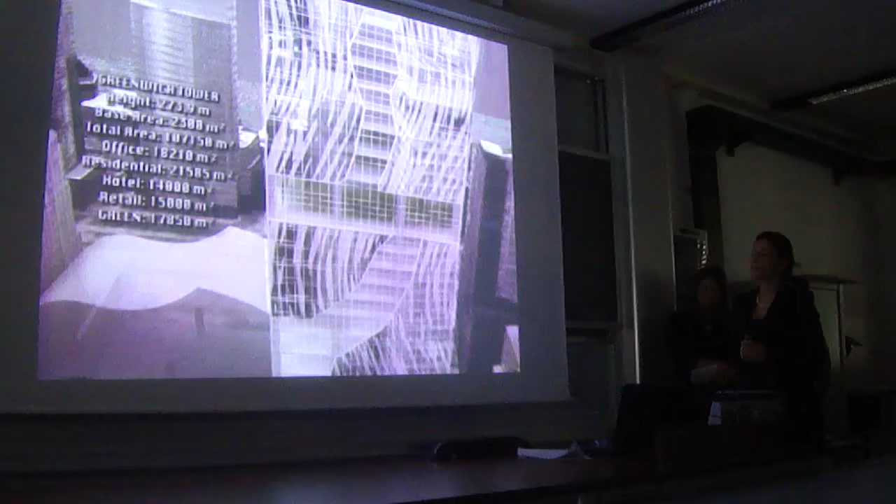So this is the summary of the zoning, the financial district, and Battery Park City, mostly residential and offices. And this is the platform summary and the views of the Statue of Liberty. The facts about the building and the numbers, approximately.

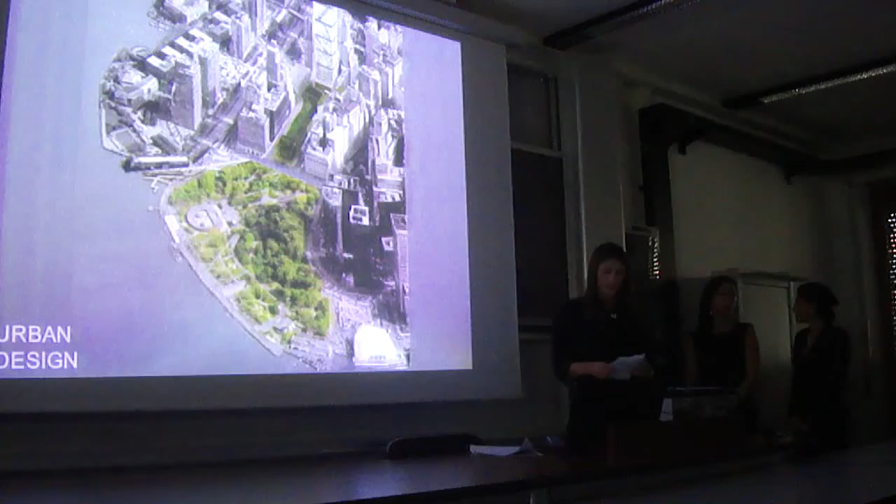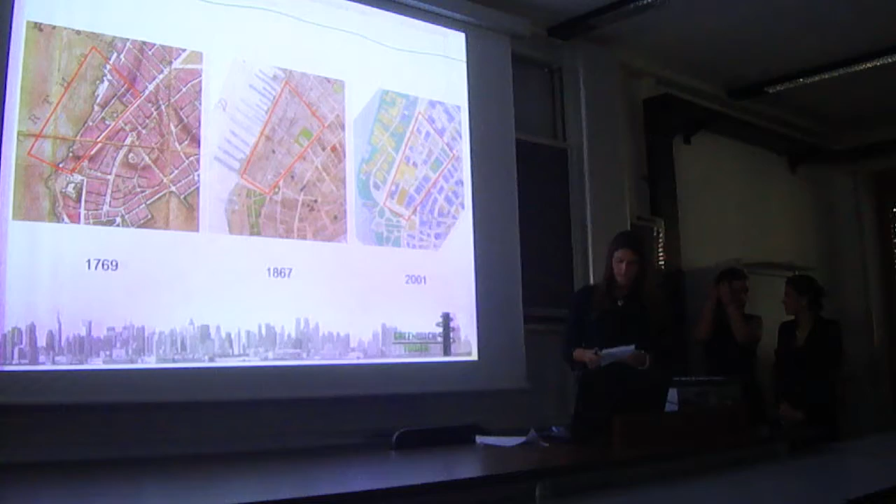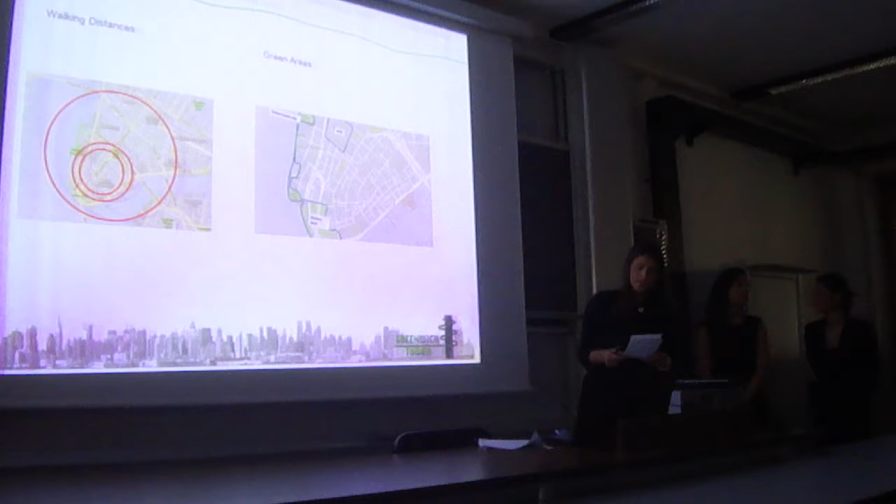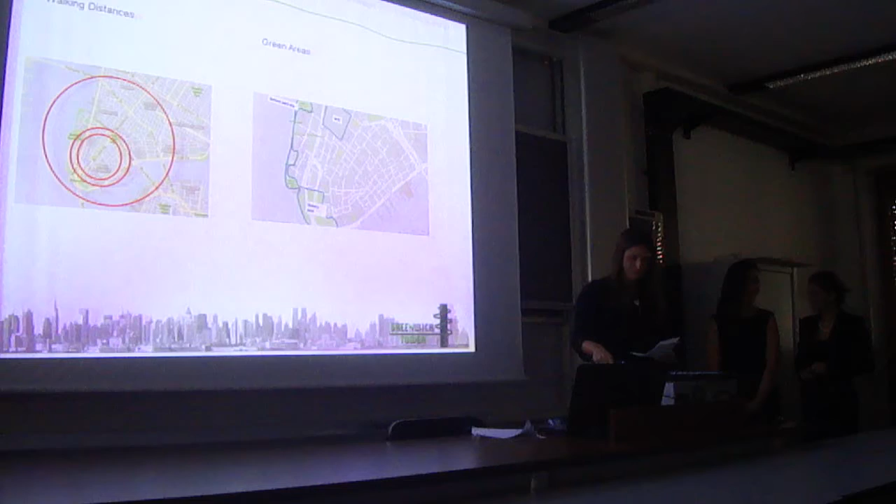With the urban design part, what we basically did was to cover the Brooklyn Battery Tunnel with a green platform, creating a new park. The area is located in Lower Manhattan, in the district of Greenwich South. We can see the development of this area through the years. Our main neighbors are Wall Street, the World Trade Center, Battery Park, and Battery Park City. All these sites are 5 minutes walking distance from the center where our tower is located. We don't have green areas inside our zone, but we have a few close to it. The scale of the area is about 11 Piazza del Duomo.

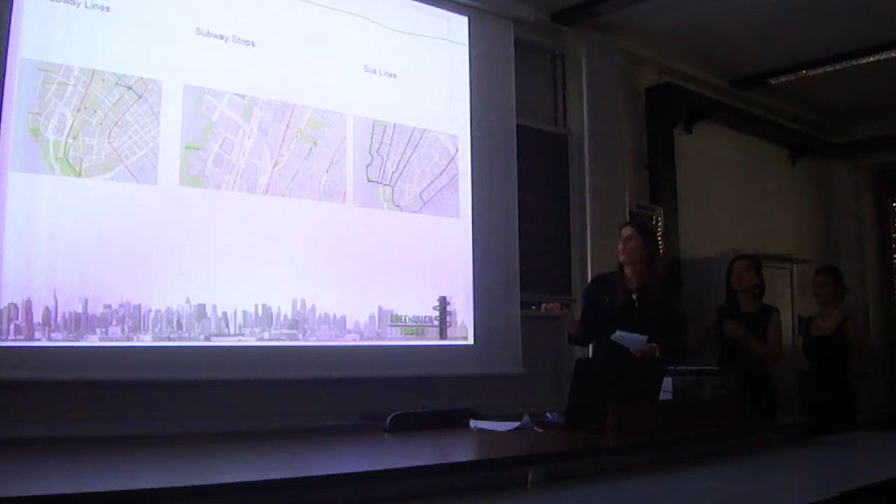As well as the whole city, it's well served by public transportation, but we wanted to increase the bike routes to encourage people to bike and walk. From the SWOT analysis, what we got is that our weakness is the existing tunnel, but at the same time it is our opportunity because we are creating a new public space.

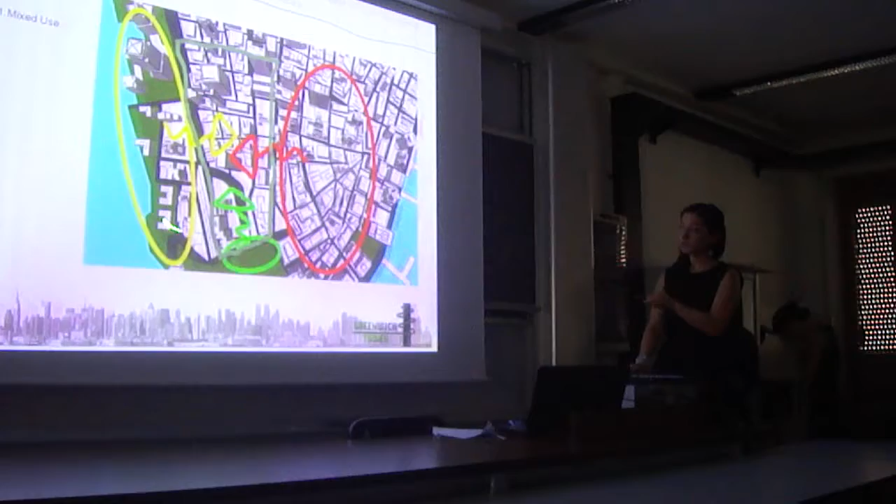So for our design, we set some goals. And first goal, as we mentioned, was to create a mixed use because, as you know, our Greenwich neighborhood is just in between a workplace and a living place. So we wanted to create a place that combines work, live and play, and that brings all together into one zone.

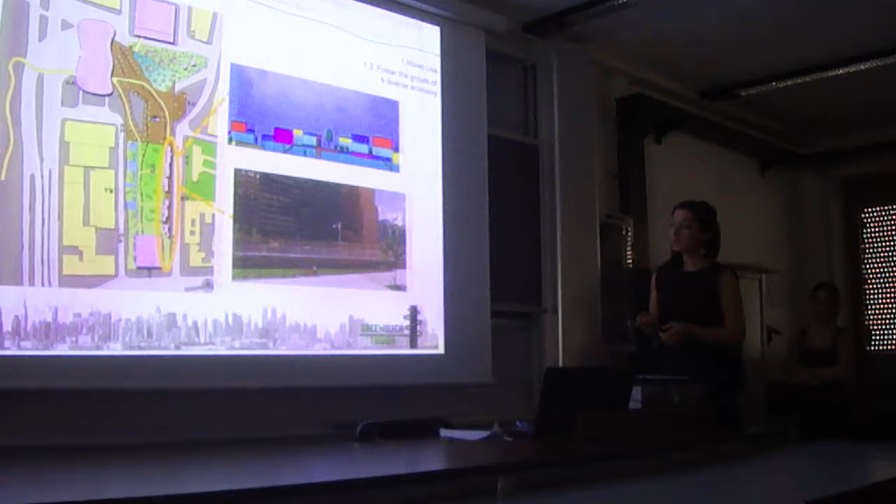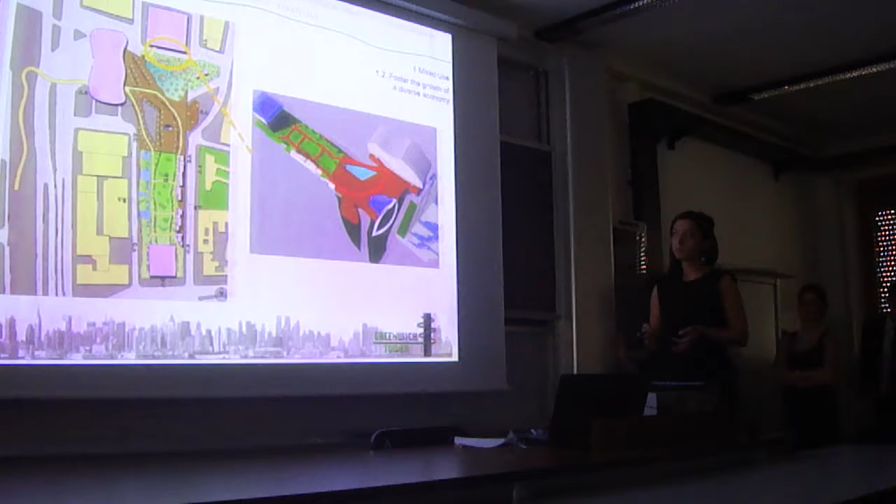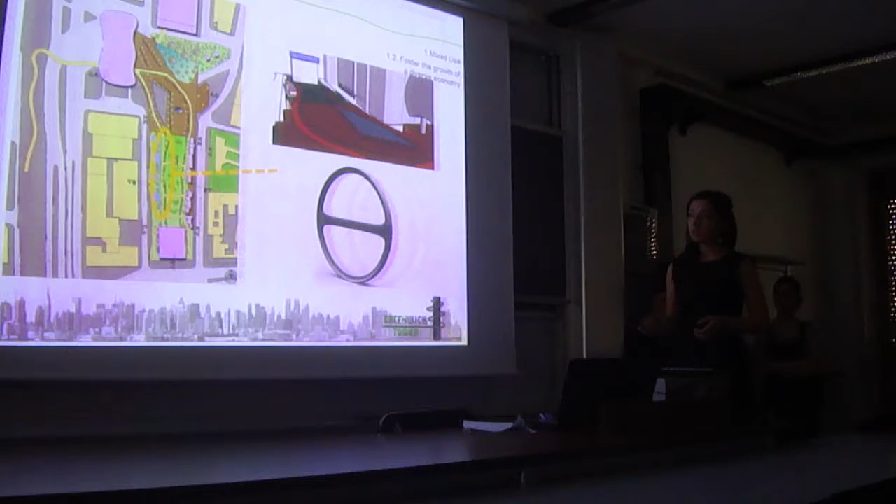For this purpose, after closing the tunnel with a platform, we started to try to foster the growth of a diverse economy by, first of all, creating some little shops along the street which serve two levels, the zero level and the platform level. Then we opened a street right in front of our building which will provide easy access by taxis and by cars. And the third one was to create a Wi-Fi zone on top of our platform. And finally, we created a bike lane, which also provides bike parking that combines with the existing route.

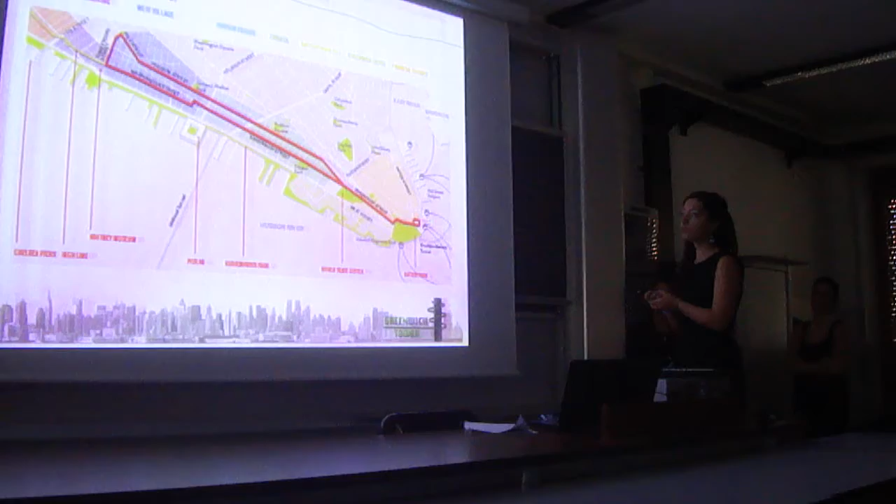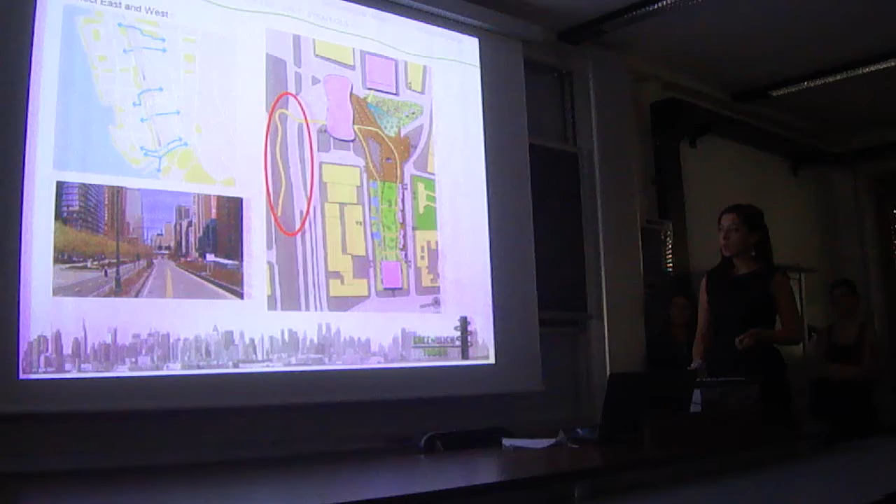And the second aim was to reconnect Greenwich Street because, as you see, Greenwich lies on a lane which has many important spots, but Greenwich hasn't received its right value. For that purpose, we made Greenwich a main street, and we created shops which would provide a 24-hour alive street. Then we wanted to connect east and west. For this purpose, mainly we wanted to connect the 12th Avenue, which is really big, has a tunnel, and the accessibility is really difficult. And for that, we created a ramp that is also accessible by bike and pedestrians.

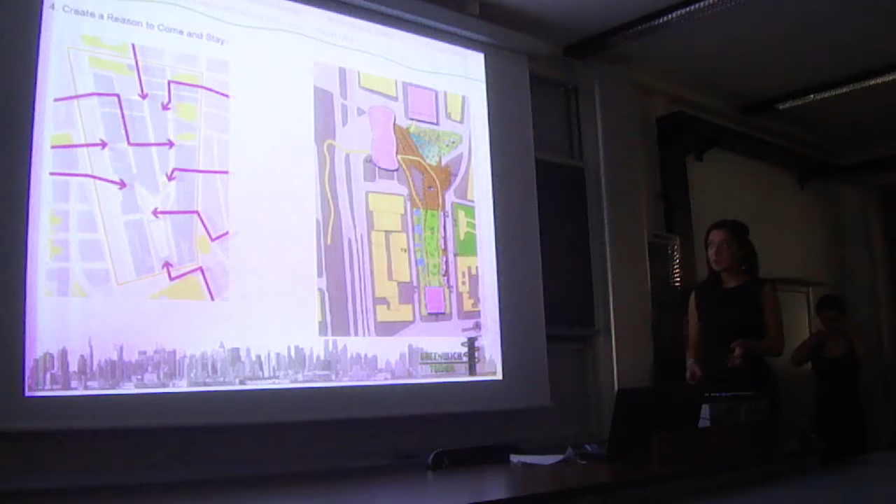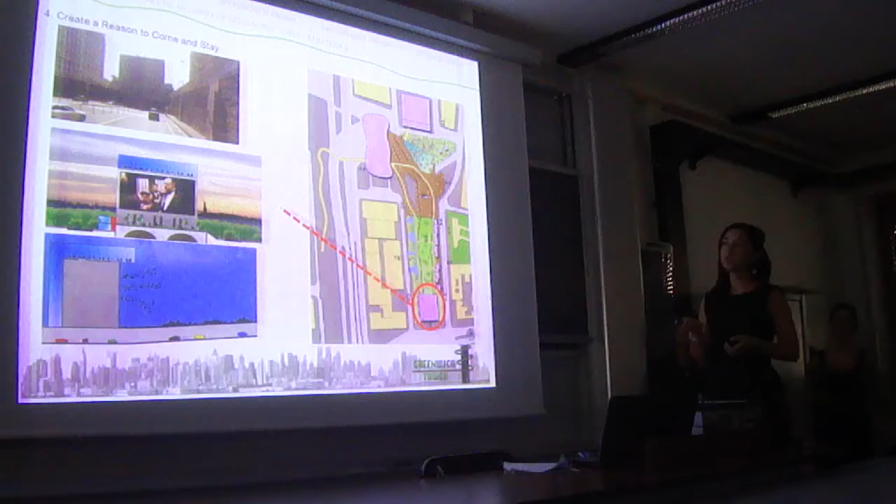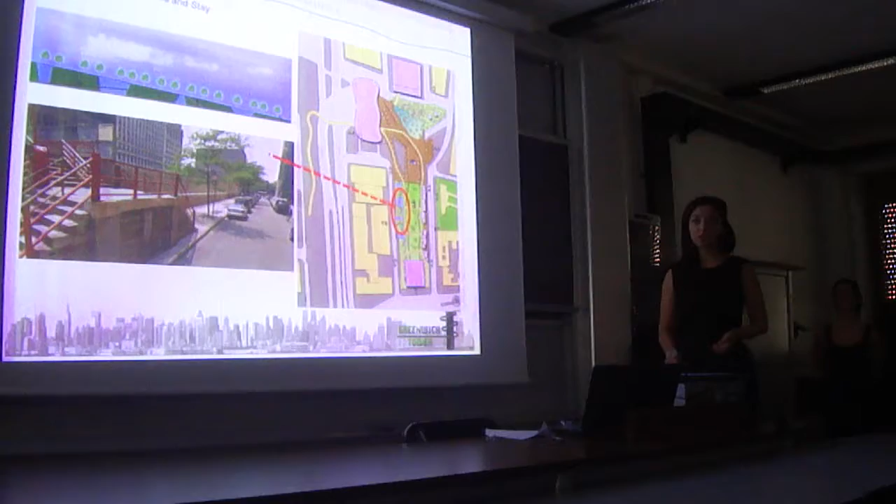And last but not least, we wanted to create a reason for people not only to come here, but to come here and stay here. For that, first we opened an open-air cinema. So when you sit here, you can watch your screen, and you can have both your movie and also the Statue of Liberty view. Second, we created a hill with waterfalls that would give a green experience in the center of a metropolitan city.

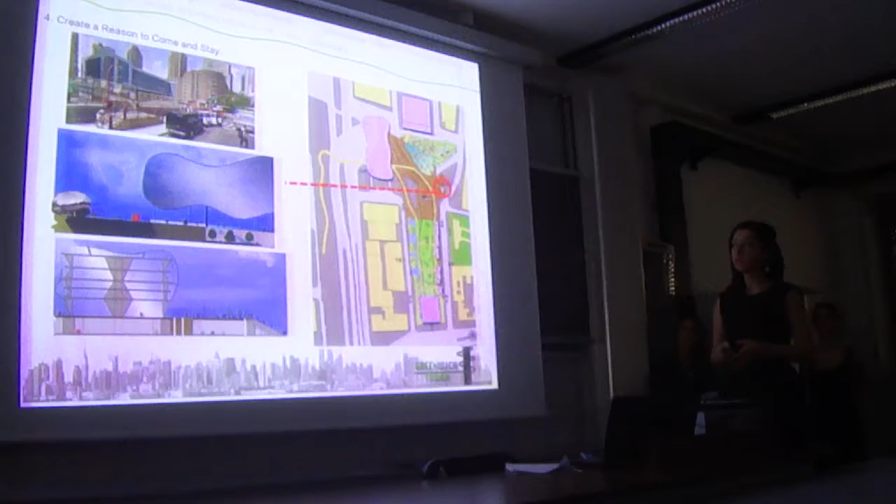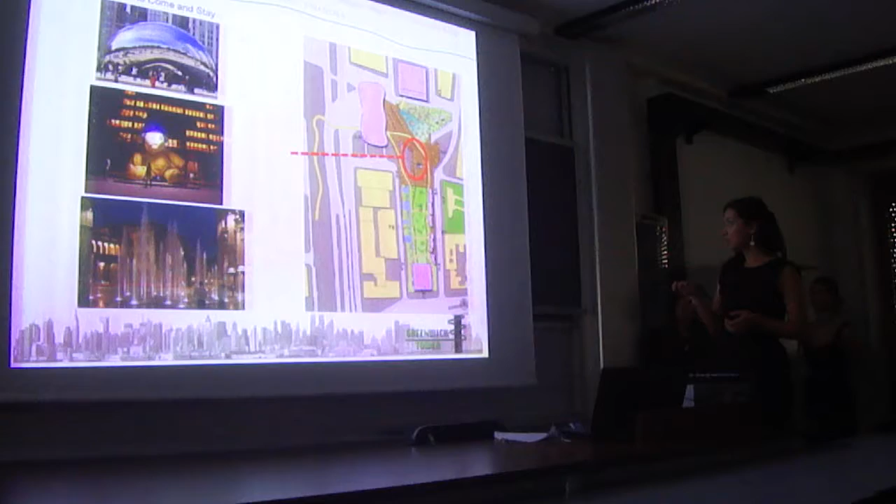And then we created a staircase. As you might know, in New York, stairs have a special meaning. Especially, this stair is a light structure that hides the metro exit, and plus it has a bike park. And finally, we created some water fountains plus monuments that are really in fashion right now in New York.

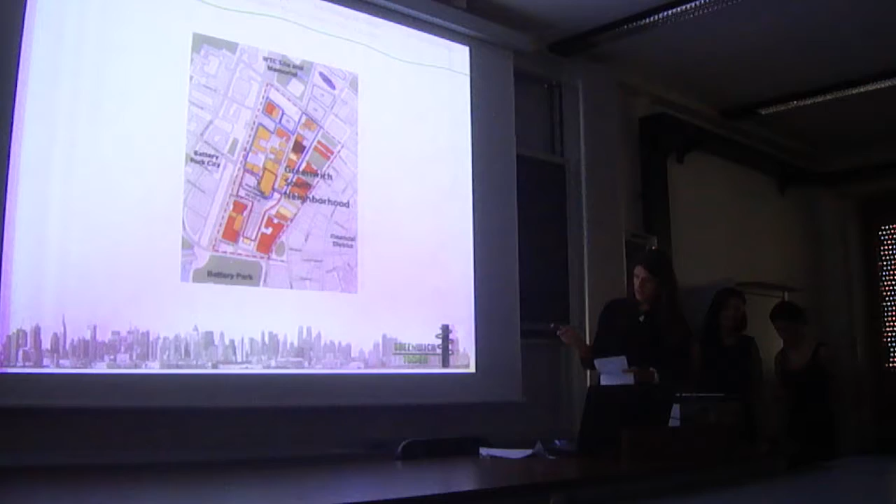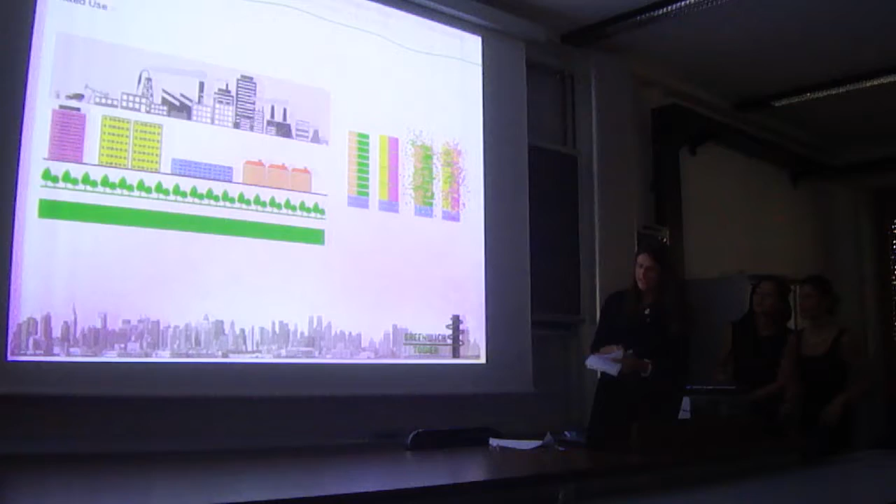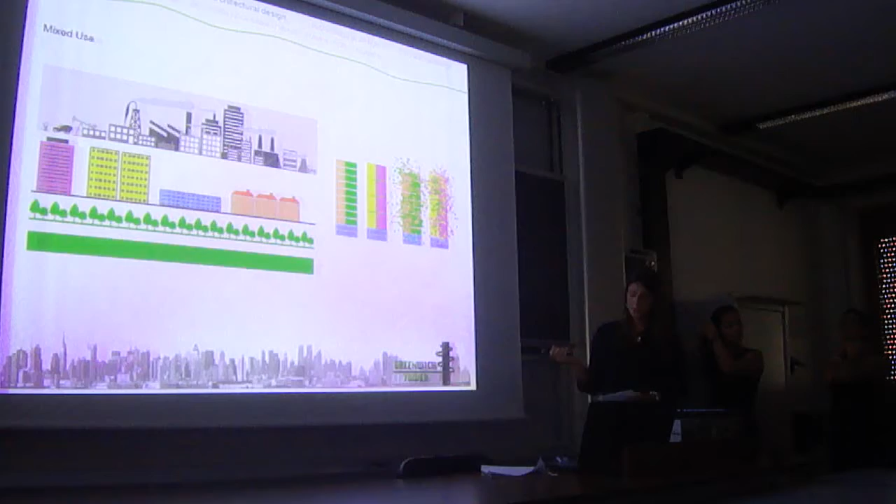Okay, continue with the architectural design of the tower. We are doing the skyscraper on the site of a garage building here that we are going to demolish. Here is another garage building that we are redesigning but keeping the same function. We have two main concepts. The first one is the mixed use. Our tower should be a piece of a vertical city. And we want the presence of people in the building at different schedules for different uses, but at the same time they can share some facilities in common.

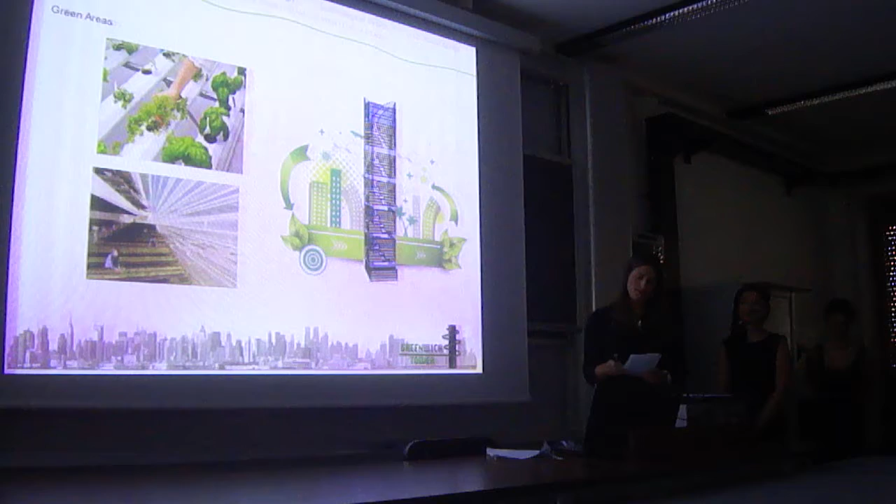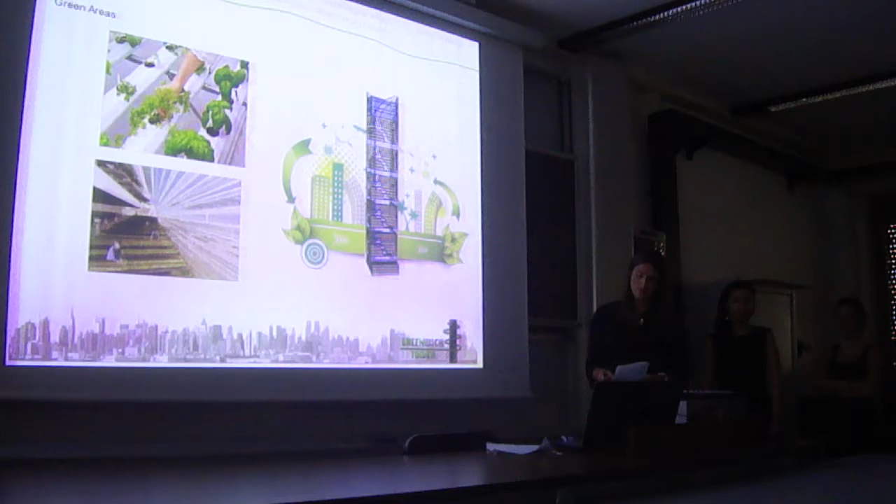The second concept is about the green areas. We are using the green as a function with the same importance as the other ones. So we have main green floors along the tower, but we also have pieces of green areas on each floor, and they are all connected through the facades. We want to introduce also the concept of urban farm. That means we will rent these pieces of land for hobby farming purposes.

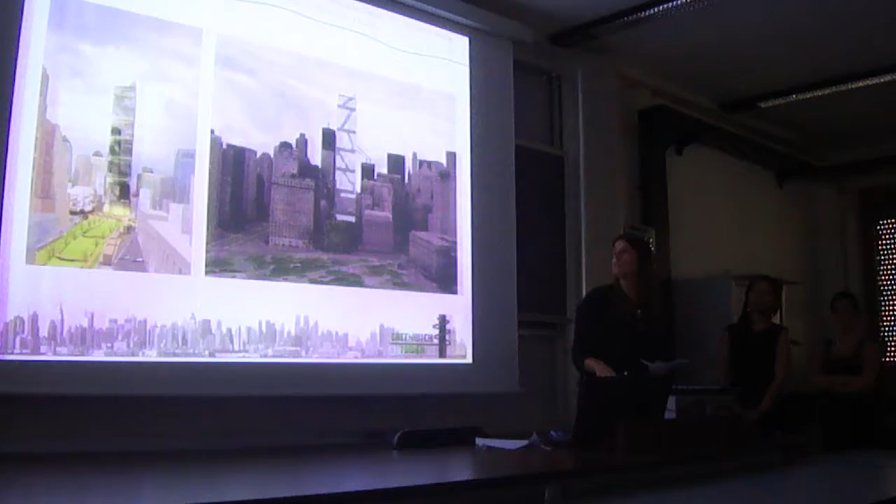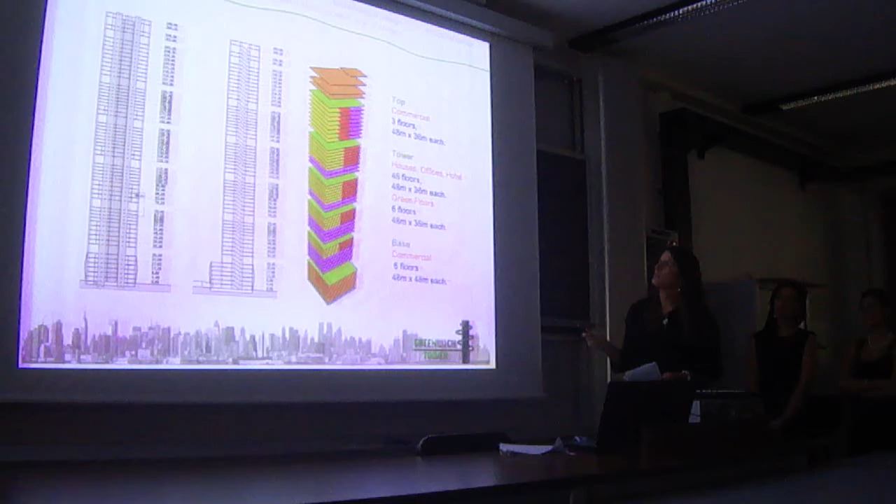This is our final volume. We decided on a regular shape. So the tower has a commercial base, and the top is commercial as well. Then it's divided into 5 blocks, divided by the public green floors. Each block starts with office floors, and then it finishes with residential and hotel, except on the last block where we mix all 3 functions.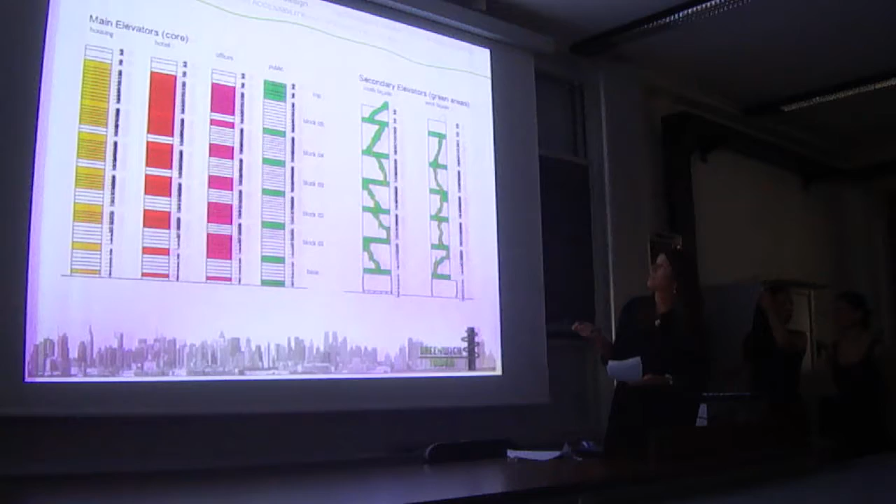The accessibility. The commercial base has its independent circulation. So for the tower, the elevators are separated by function. It means if you get an office elevator, you cannot access the hotel area, even if they are on the same floor. We have the chance to switch to another group of elevators in the public floors, because they have sky lobbies for each function to control the access. The secondary elevators are for the green areas on the south and west facade, where our farm zones are.

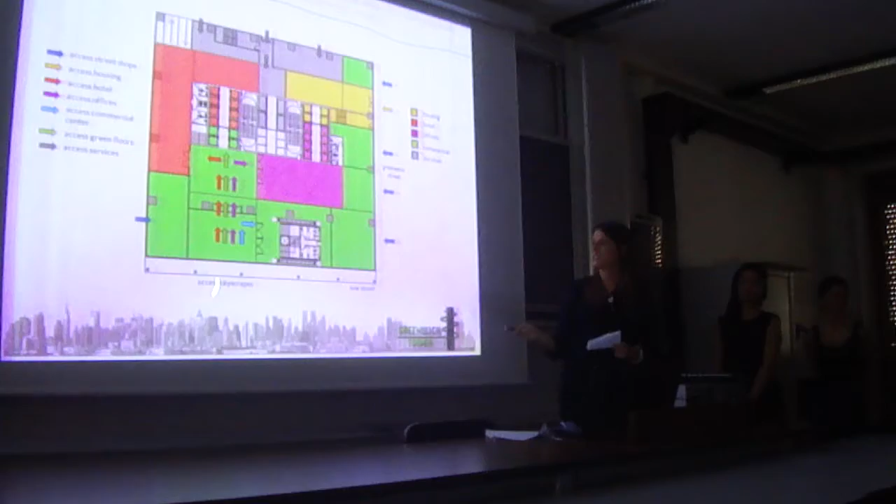Module: we started the plans creating the service core, and then a 3x3 grid. 3 meters because we fit a hotel room, and also because of the mullions of the facade of 1.5 meters. This is the accessibility on the ground floor. On the south is the main entrance of the skyscraper, and from here you can access the public commercial base, the public elevators, the offices lobby, the hotel lobby. The housing has a private entrance, and here we have street shops. Here the service entrance and parking entrance.

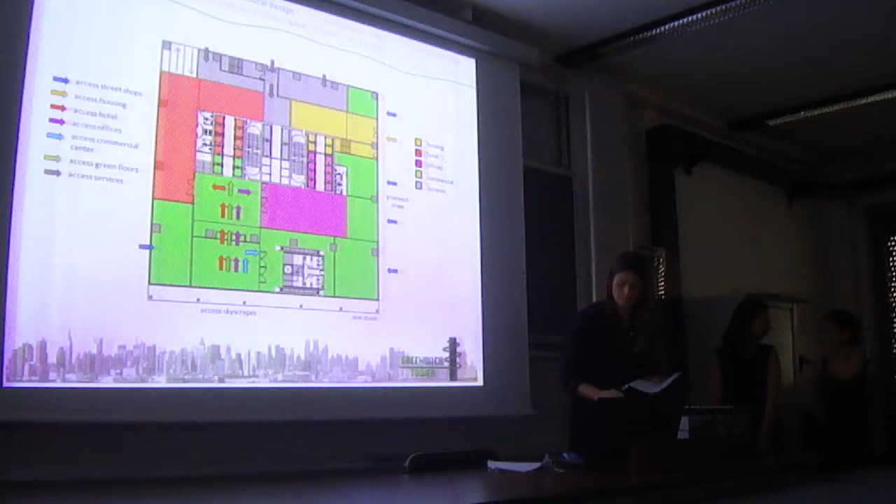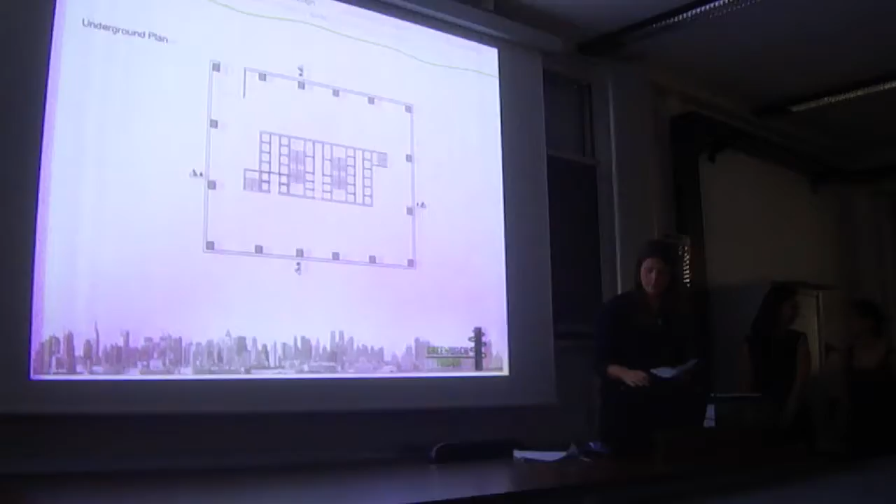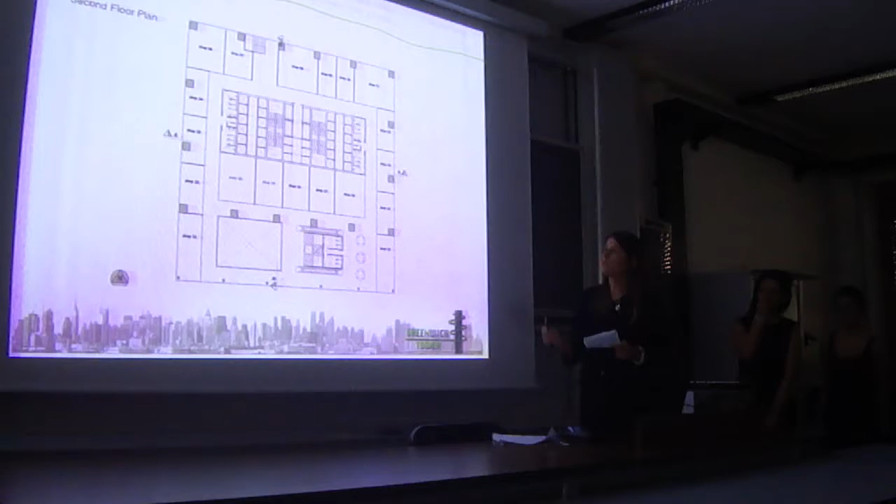The underground floor. In the underground, we have a mechanical parking system. From the underground, you can access the ground floor through stairs, or access the public green floors through the public elevators here. On the first floor, we have our food court, because of the lack of places to eat in this zone. We are making this connected to the platform level here. On the second floor, we start the shops, and it's the same up to the 5th for the commercial base.

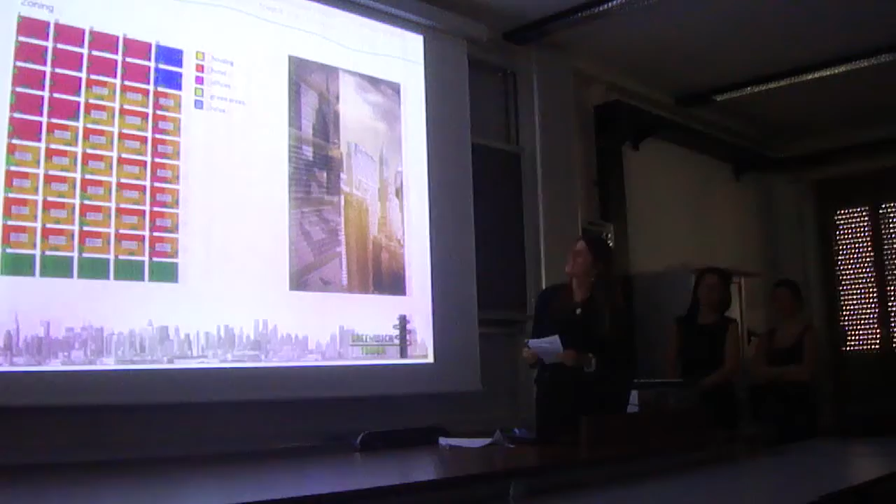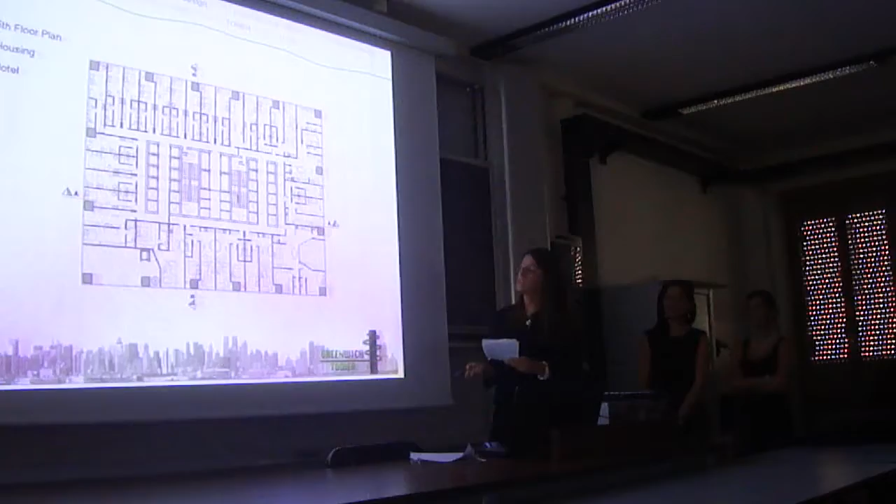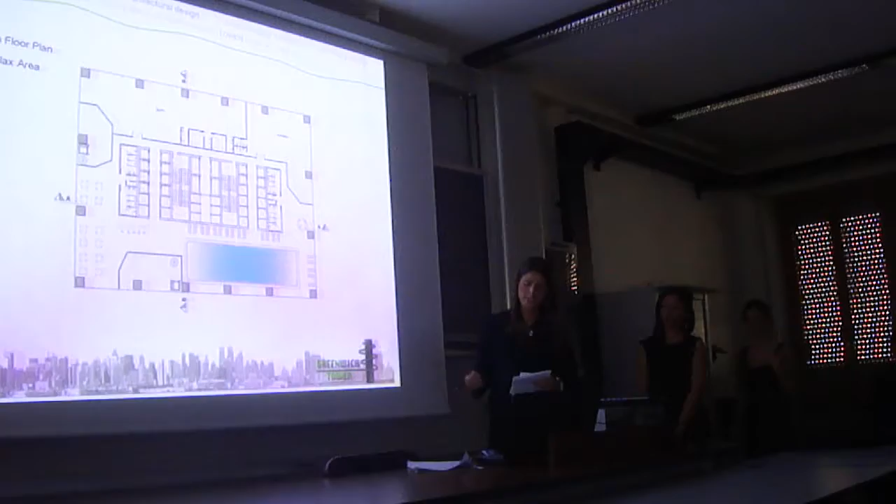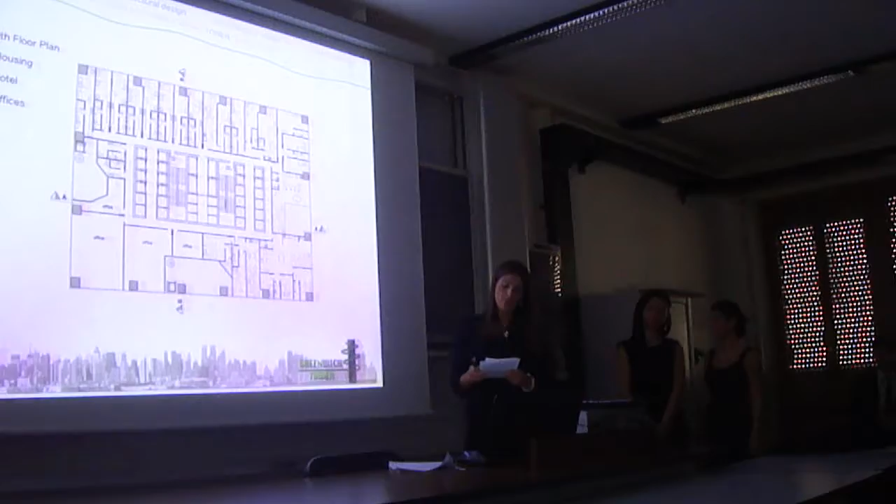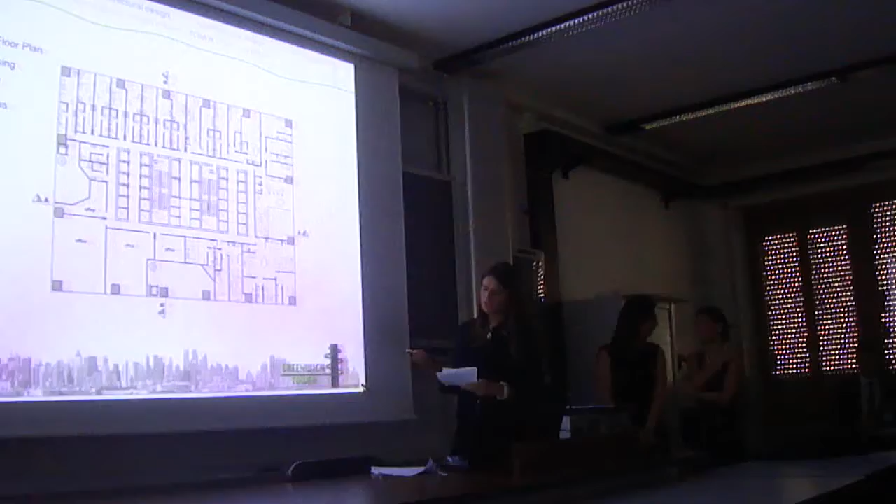In the last block, we finally can mix all the functions, all the 4 functions. The floor height is higher, and they are the upper floors. It's with the best view, which means that we have more expensive apartments and hotel rooms. The offices area is also different, because now we have smaller rooms, for example, for lawyers instead of the big companies. This is the top, it's a triangular closing, it's a continuation of the green paths. It creates a peculiar space, ideal for a coffee shop with different levels.

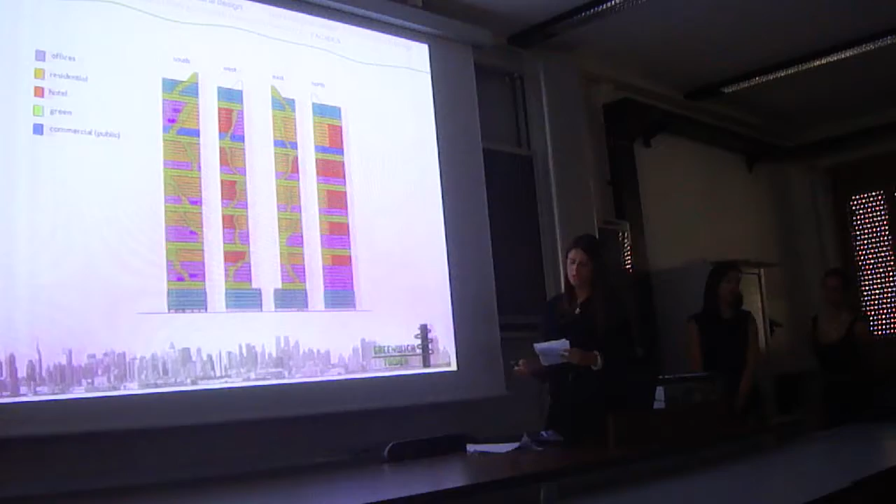Here the facade orientation in our conception. The apartments deserve the best solar orientation, so most of them are in the south and in the east. We use the north mostly for hotel rooms because they are used at night. Here is study of patterns for the facades, and this is how it looks like in the end.

And so the technological design. First of all, we wanted to create some boundaries for us, for which we use LEED. As you know, LEED is the system that the United States uses for green design. It has different levels, and they get these results according to sustainable sites, water efficiency, energy and atmosphere, materials and resources, indoor environmental quality, and innovation in design.

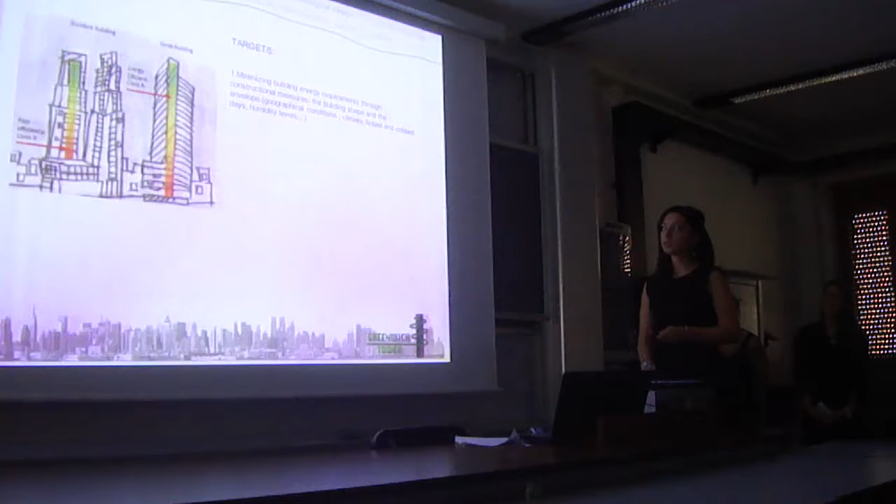And our first target was to minimize the building energy requirements through construction measures, which mean the building shape and the envelope. For this purpose, we needed to go through all the data that we could find. And we started designing our system for an efficient technological system. For this purpose, we started defining the orientation and shape. The shape was, for simplicity, a square. Then we turned it into a rectangle for a better saving of daylight. And we gave south to housing and green and north to hotel.

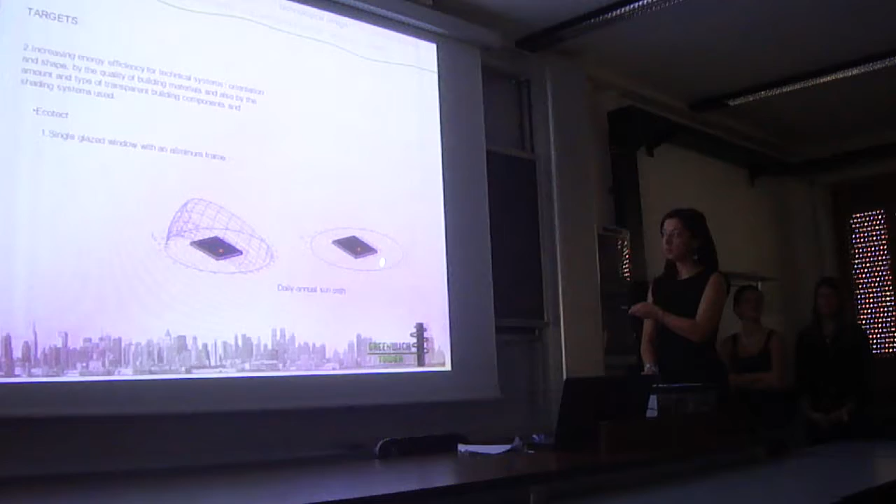And for the design of the facade, we started using Ecotect. First we did some calculations for single glazed windows with an aluminum frame on the model that we created for a single floor. After the calculations, we calculated the same system for double glazing low-E windows because we wanted to have a whole glass facade. After these results, we compared them and we saw, of course, double glazing low-E windows would give much better results.

And for solar protection, since we have a whole glass facade, we needed to find some solutions. The first solution was fritted glass. And the second was movable louvers, because we have 3 different types of usages in our building. We didn't want to fix one type of solar protection in our system.

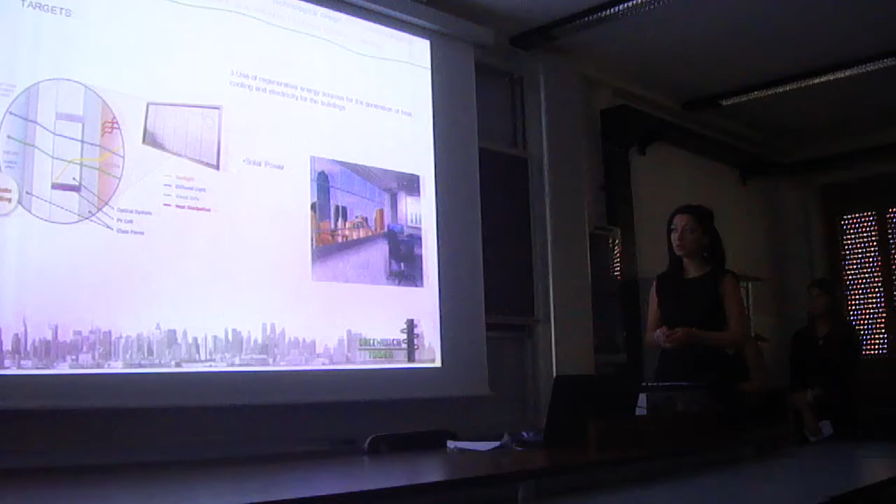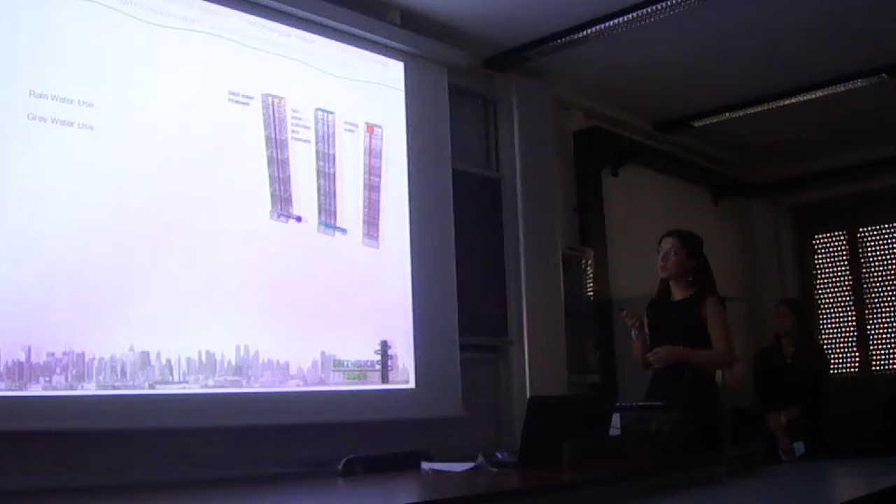For this purpose, we created a black water treatment at the base of our skyscraper, and this tank would treat the water and send it back to the top and collect it as grey water, which would be used later in the lavatory, in the flushes. Also, we collected rainwater at the rooftops, and we send it back to the same tank. We created another tank for drinkable water in order to prevent any problems because of the pressure.

The main problem actually in our building was the building service design, because we have three different types of usages, so they need different service systems. But we decided to use an all-air system for the whole building for simplicity. And to go more into detail, for example, for office we use underfloor air distribution, and the core was in the center and then distributed to the whole floor. The air can be distributed underfloor and then collected from the ceiling.

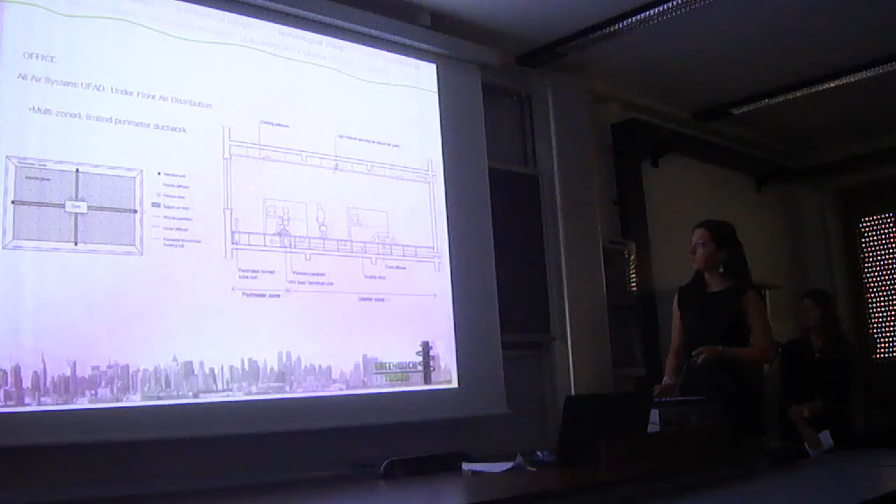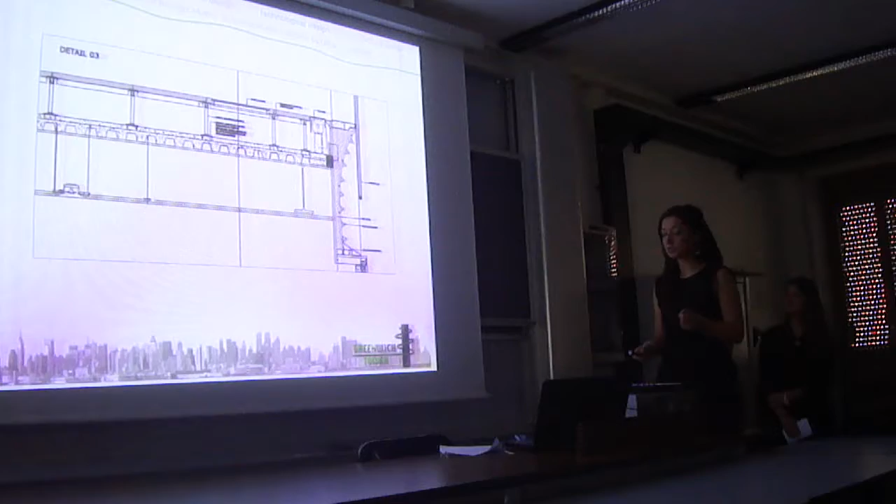And when we come to the details, as you see, the slab is a normal slab which is mainly used in the buildings. But our innovation was creating a facade which would look different from outside. So we used silicone double glazed window, and plus we wanted to create a metal, reflective metal especially, that would take the light and diffuse it like a disco ball actually.

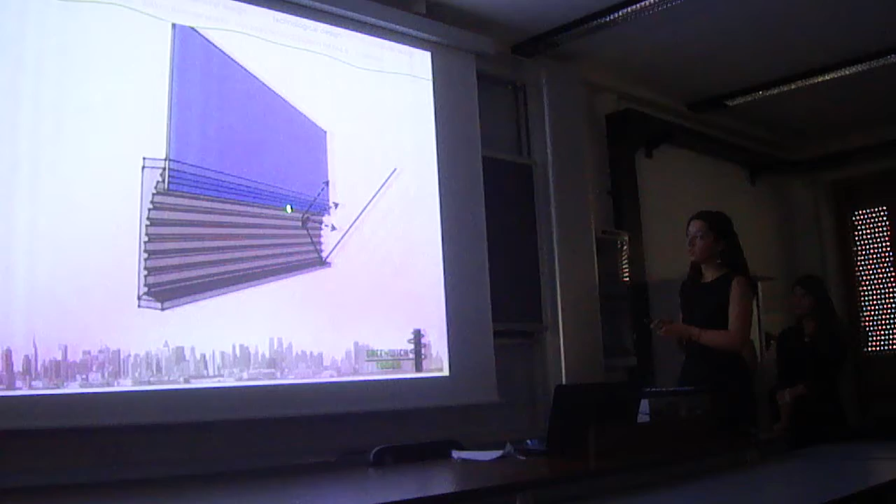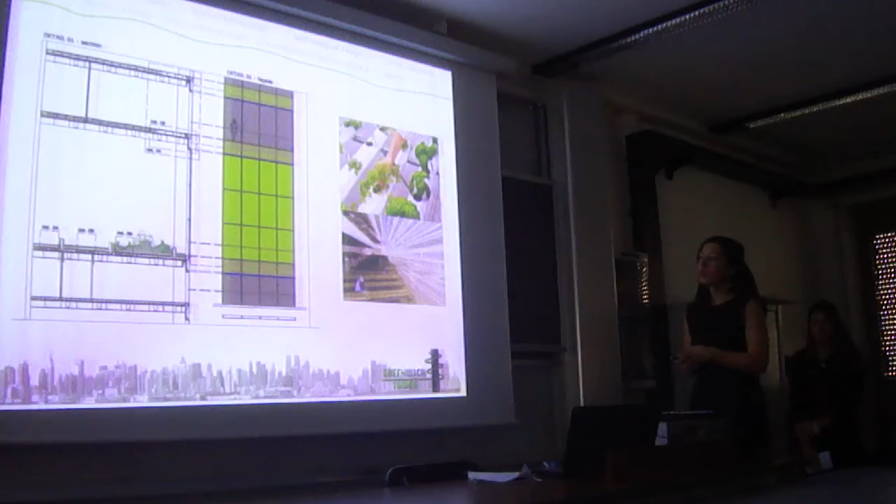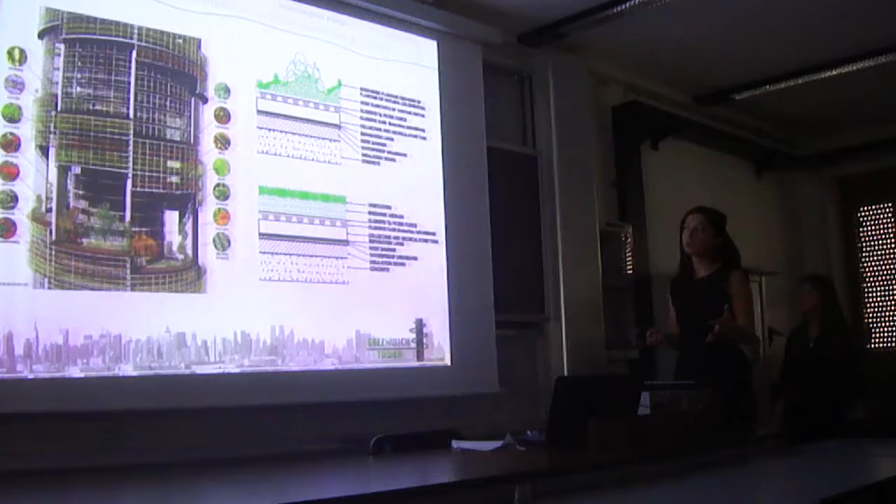And since we wanted people to do their farming inside the building, we created different types of soils for different types of usages. And since not many people know how to do their farming inside the building, we set a guidance for them: what they can create, what they can produce inside the building, and which type of soil they need to use. And also, we gave openable windows to the green for better natural ventilation.

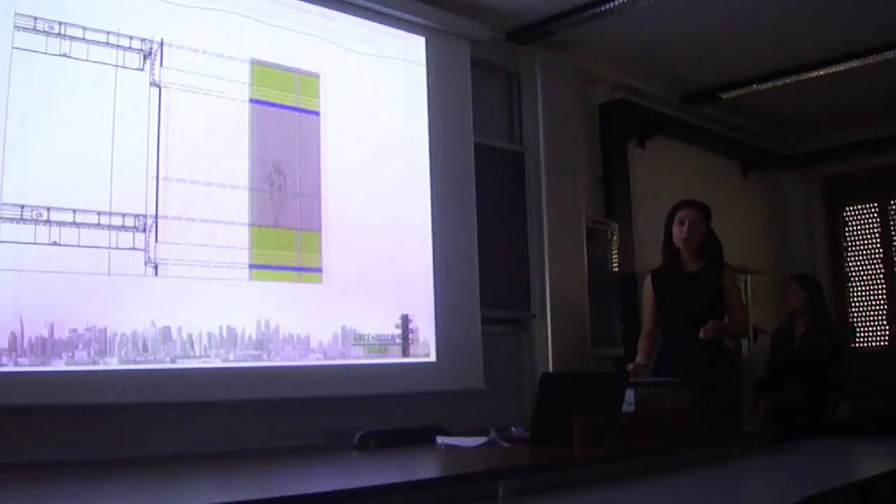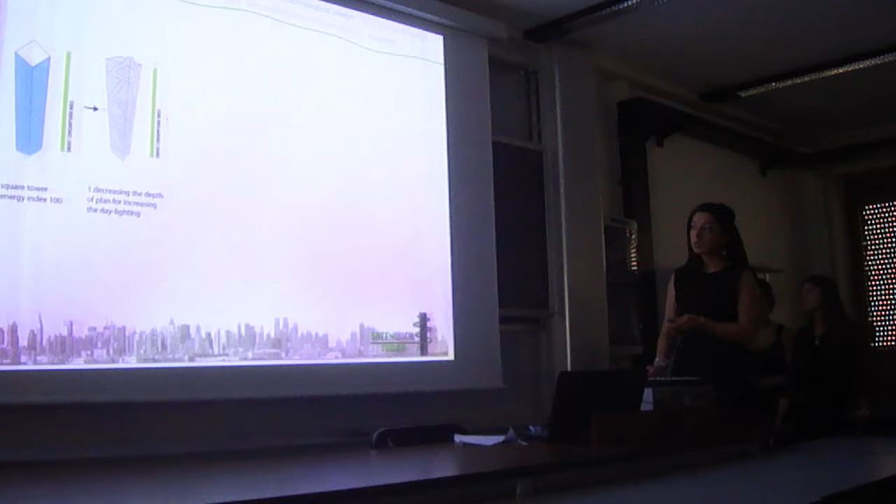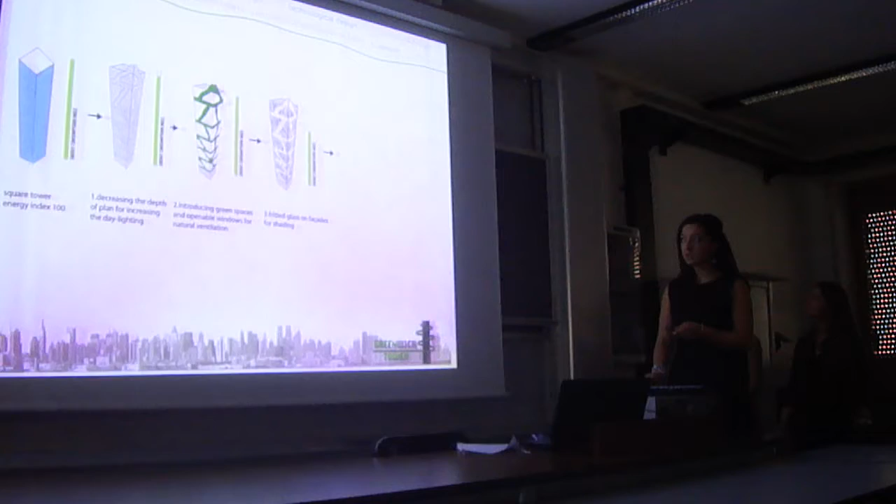So when we summarize everything, as you can see, our energy consumption was so high at the beginning when we started with a square building. Then we turned it into a rectangle and decreased the energy consumption. And with openable windows inside the green spaces, we created natural ventilation. And we produce fritted glasses, and from these fritted glasses we produce solar energy, and finally we collected the water and we almost decreased our energy consumption to half.

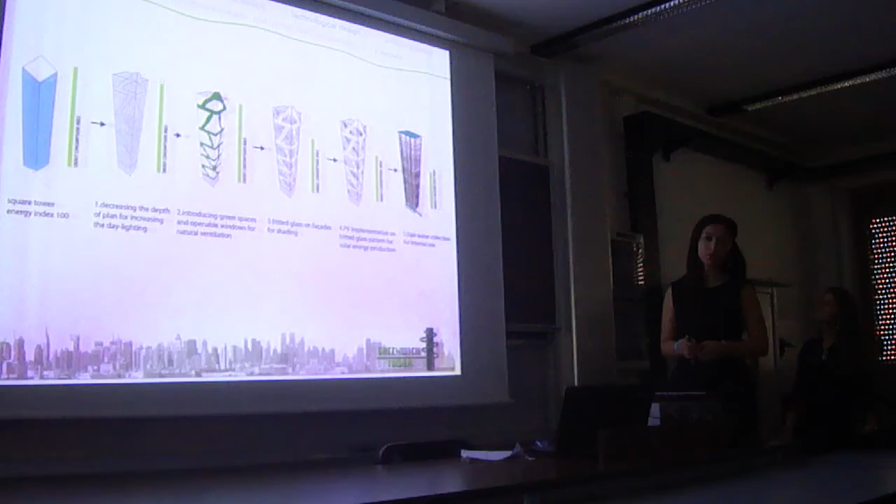with composite concrete cast on site metal deck, over the European steel section I-beams, and connecting to a reinforced concrete shear wall and 1.5 meter square composite and reinforced concrete encased composite steel beams. We used European sections and materials, but we used American standards.

So, why tube-in-tube system, and basically what tube-in-tube system is? For buildings over 40 stories, and Greenwich Tower is 60 stories, concrete as the vertical elements is more efficient than the steel systems. But steel systems, of course, have the lightness in the horizontal elements. So, for optimizing all these facts, we have chosen to have steel beams connected to concrete vertical elements. And since steel is cheaper in the United States, it is already a good application.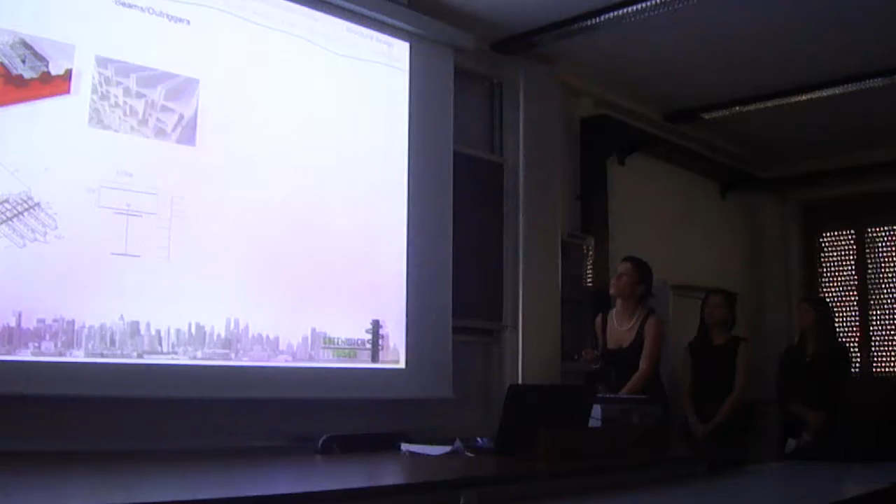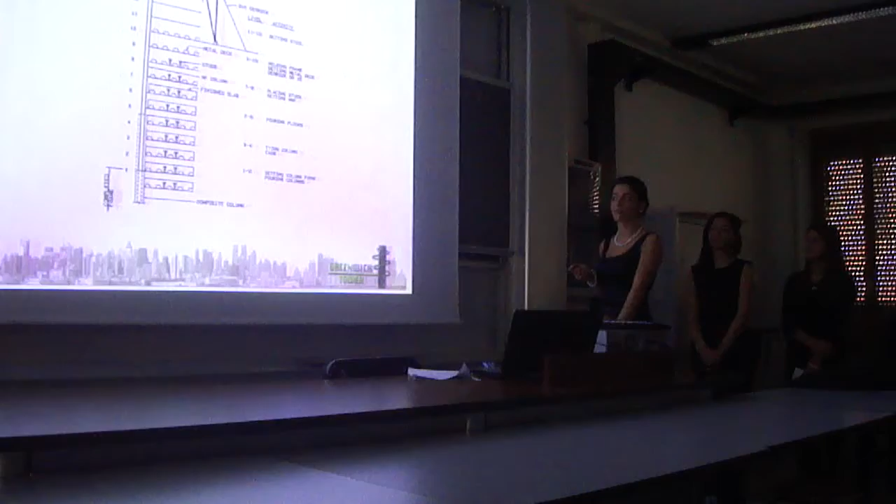So basically these are the detailed drawings and examples of the slabs, composite slabs, and beams as outriggers connecting like pin connections to the columns. And the column details and connections, and the shear walls. So since it is a mixing of systems which requires good laborship, this is an example of the construction sequence, and it needs qualified laborship for all these systems.

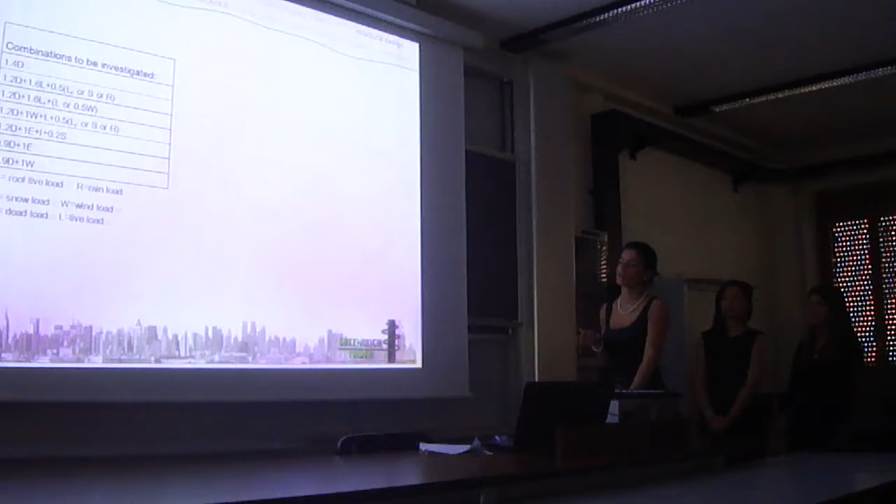So these are basically the loading cases recommended from the American standards. And the gravitational loads are more critical, of course, for the beams and slab structures. And of course, for the vertical elements, it's the wind which defines the dimensions of the structures. It is different from other cities because New York isn't an earthquake critical region, so wind loadings on the facade are usually more critical.

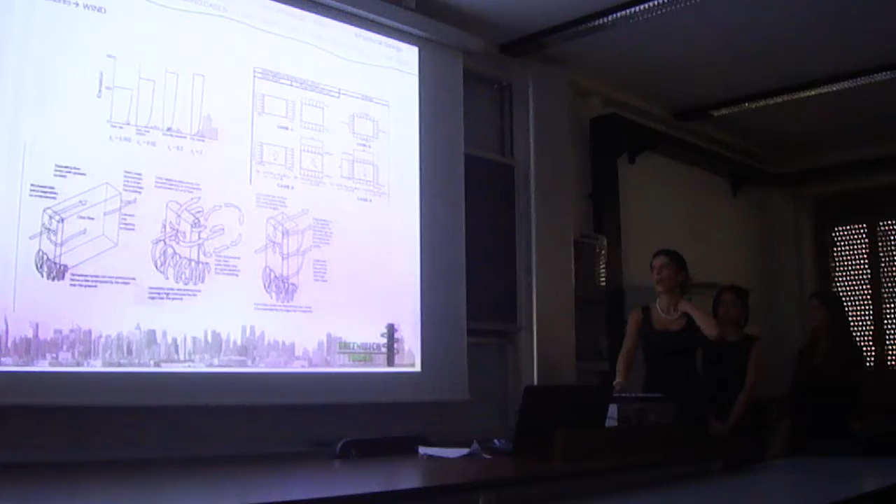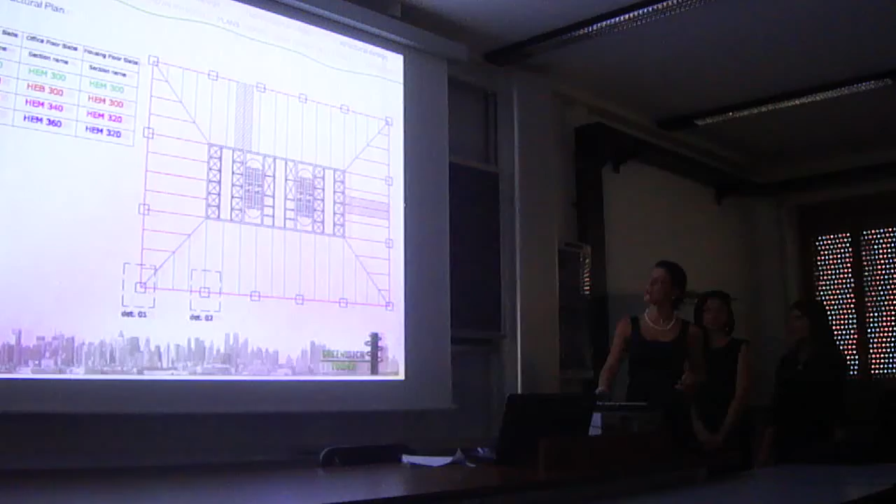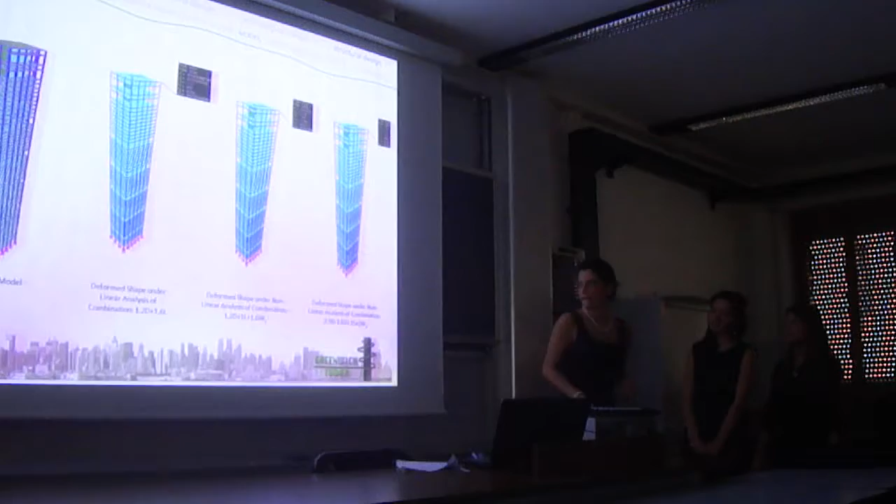And so this is the structural model done by the SAP 2000 program, and these are the most critical analysis results and loading cases, where W corresponds to the wind, and dead load and live load. So this is the total weight of the building, which looks a lot, but it is normal for a structure of 60 stories. And the most critical loading cases. So we have applied these checks for the beams, columns, and other elements. So these are the details which are provided after the checks.

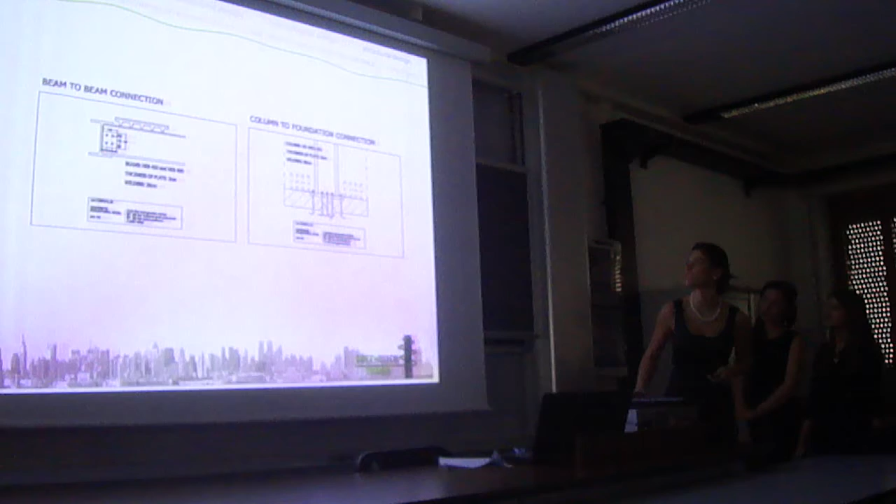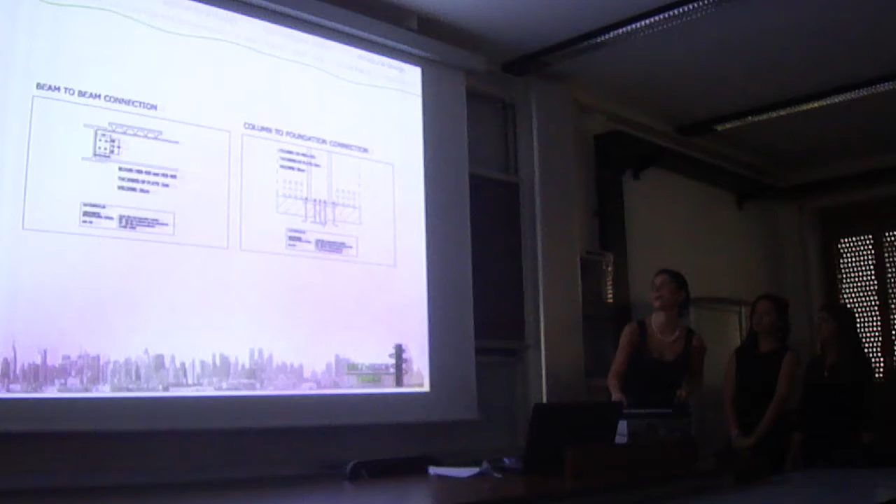So basically we have all the columns connecting in the same mode since they have the same directions, and the outrigger beams connecting to the main beams on the outer structure. We have 2 different types of connections between steel and steel, and since we have diagonal beams connecting, they are connecting onto the outer core of the concrete columns. So these are in detail how they work.

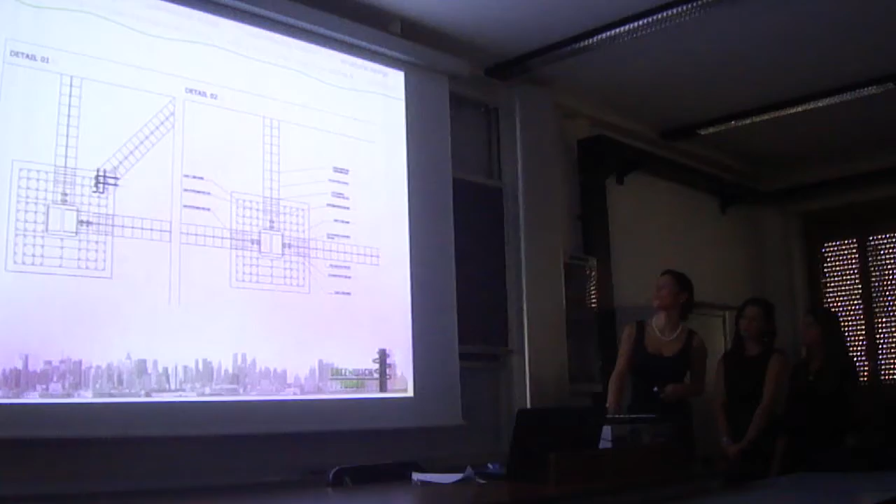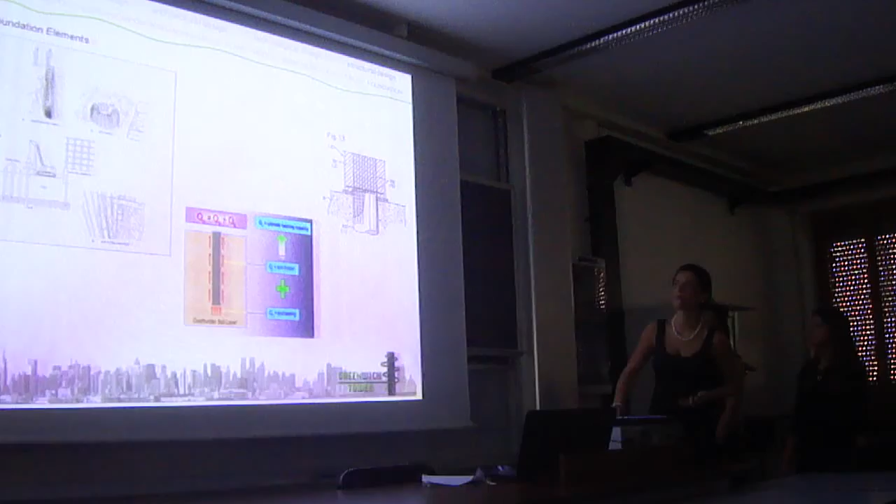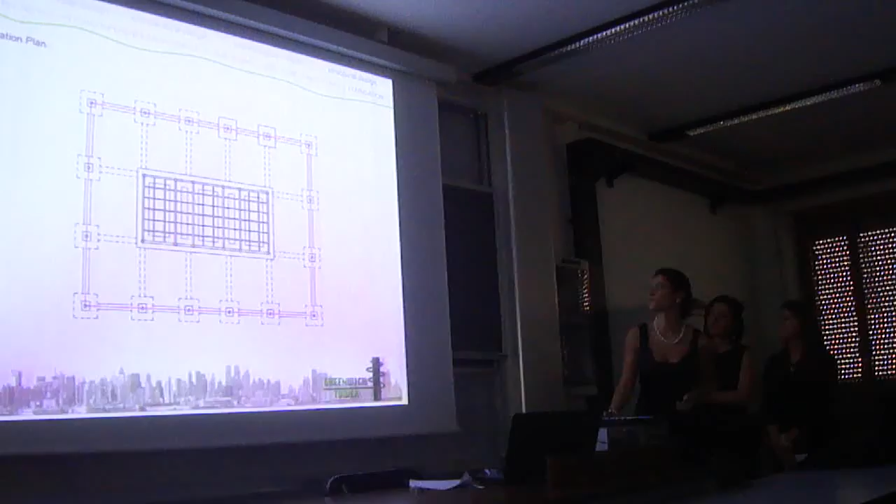So in reality, for the foundation, there is a whole group of engineers working. So this is basically a rough estimation of the foundation. Although in New York it's not necessary to have pile foundations, we have preferred it for technological aspects and also for excessive overturning moments. So this is the rough estimation of the foundation plans for the building. So this is the final result after all of the evaluation.